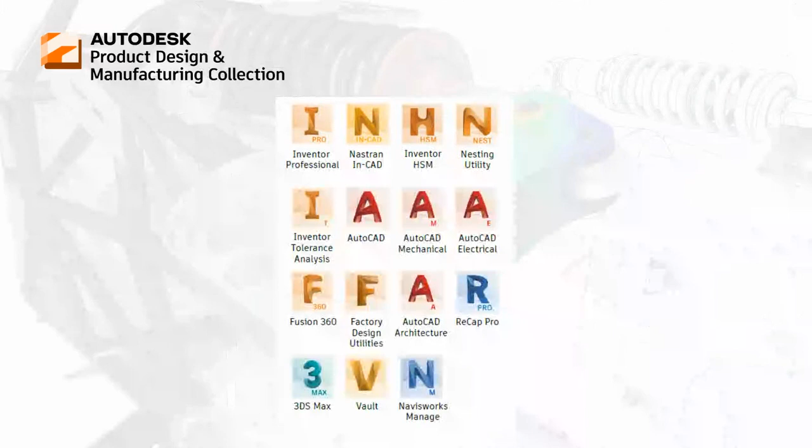So what is the product design and manufacturing collection? Autodesk came up with this idea as a solution. They didn't want to just create a product, Inventor, and have all these features in it. Because so many of us have cross disciplines in which we work, they came out with a collection. It's a powerful set of applications that provide extended capabilities to Inventor and AutoCAD for engineers who design complex and custom products, equipment, and systems.

With the collection, you can extend Inventor with a lot of add-ons for tolerance analysis, simulation, and production layout. We can use connected products for 2D drafting, large-scale design review, and visualization. We can connect to Fusion 360 to access Autodesk's next-generation capabilities and their collaboration tools.

Let's first discuss engineering design workflows. The first one we want to discuss is cloud-based 3D CAD. Cloud-based or online CAD software runs in a local browser or through a web or mobile app. Unlike traditional software installed on a local computer, you don't need to do any of that. You simply go online and it's there and always up to date and active. They offer many of the same capabilities as traditional CAD software, but are updated through a remote server and are acquired through a subscription, usually monthly or annual.

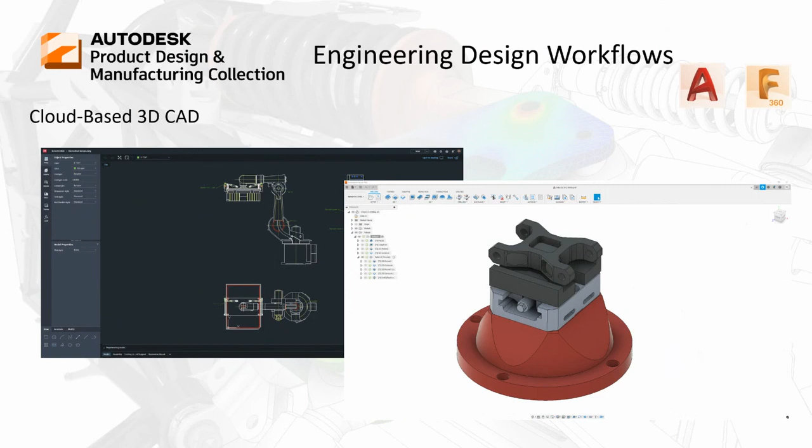It allows you to work remotely and collaborate with colleagues using AutoCAD and Fusion 360 from an internet browser. In addition, AutoCAD, AutoCAD LT, AutoCAD Web, and the mobile app offer connected workflows through some of the leading cloud storage providers, including Box, Google Drive, OneDrive, and Dropbox. Currently, in regards to SolidWorks, this workflow is only available as an add-on for three levels of software. The three primary levels we're going to discuss with SolidWorks today are their Standard, Professional, and Premium versions. This capability is available, but strictly as an add-on.

This one is very big. This is rules-based design automation. When we hear rules-based design, we typically think of and mean Inventor iLogic. Approximately one-third of everyone with a seat of Inventor uses iLogic regularly. It's a rules-based design engine and one of the most powerful and effective ways to save time. You can define rules to quickly reconfigure your designs. This helps satisfy the customization demands of your customers. You can even use it to generate an instant quote. And because you can quote faster and more accurately, you'll be able to get your designs to manufacturing faster.

It's also important to understand the scalability of the work you do in Inventor. What happens when you want to make your forms available to people who don't have Inventor, outside of engineering? Maybe it's sales. How can customers fill out forms from any location? When you're ready to take on the next step of automation, MicroCAD will be here to help you with Autodesk Forge. It's an automation API for Inventor where you can experience the advantages of running iLogic in the cloud.

SolidWorks does have some of these capabilities. It's very limited in all three levels of their software.

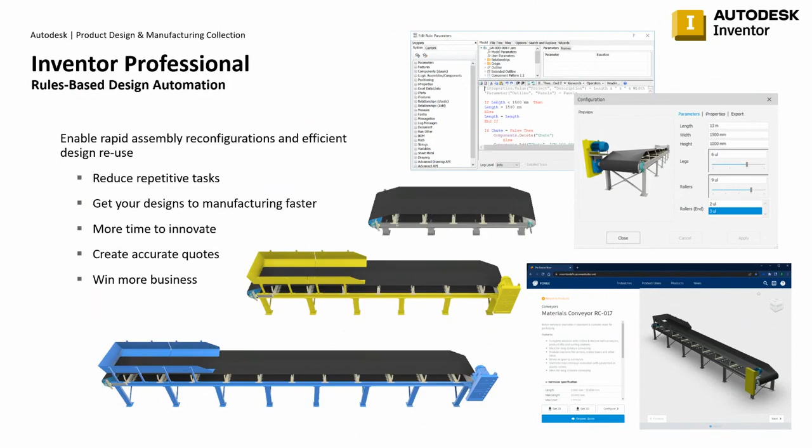Continuing with the engineering design workflows, we look at topology optimization, and the first one is lightweighting. What is lightweighting? It's how we can improve the strength to weight ratios by removing excess material that is not necessary for the design's performance requirements.

We look at shape optimization. It's a technology that helps inform certain geometry decisions to specific conditions such as manufacturing methods, maybe conventional subtractive machining, or maybe additive, 3D printing. Structural compliance calculates the physical response of a given shape depending on the forces it's subjected to. This type of technology is only available as an add-on for SolidWorks in all three of its levels, so you're increasing the cost of the software considerably with each of these add-ons.

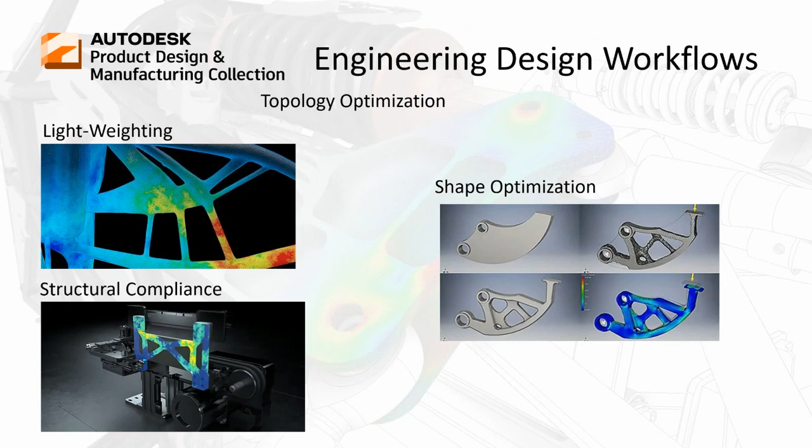Generative design is something that's very unique and very new to a lot of CAD users. It's basically a way of design exploration. Designers or engineers can input goals into their generative design software along with parameters such as performance or spatial requirements, materials, manufacturing methods, and cost constraints. The software explores all possible permutations of a solution, quickly generating design alternatives. It tests and learns from each iteration of what works and what doesn't.

As you can see here, this capability helped General Motors, shown in the top right of this slide, design a seat belt bracket that was 40% lighter, 20% stronger, but more importantly was also able to consolidate an assembly from 8 parts into 1, making it simpler and faster to install.

The second example is from a company called MJK Performance. The team was able to develop concepts faster, being able to do this and select their final design based on cost and time it would take to manufacture.

Now, the General Motors example is great, very organic, and able to be done with 3D printing or casting. That may not be the best method for everyone. It's also a consideration you want to take as far as the cost of what it takes to get to that final design. In MJK Performance's case, traditional 2.5-axis machining was appropriate for them. Then in the little image here, this is a popular bicycle manufacturer called SRAM, and they're using the technology to explore more options in some of their component designs.

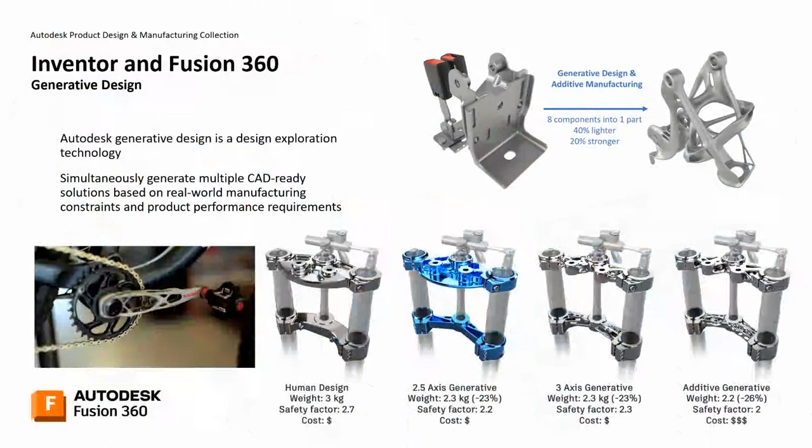Within Fusion, which is also part of the collection - there's Inventor, there's Fusion 360 - there are some technologies that are very similar between the programs, and some that are very different. In this particular example, PCB design is exclusive to Fusion 360. From the initial schematic diagram to PCB layout with layer definition to create the 3D board representation, it can all be created within Fusion 360.

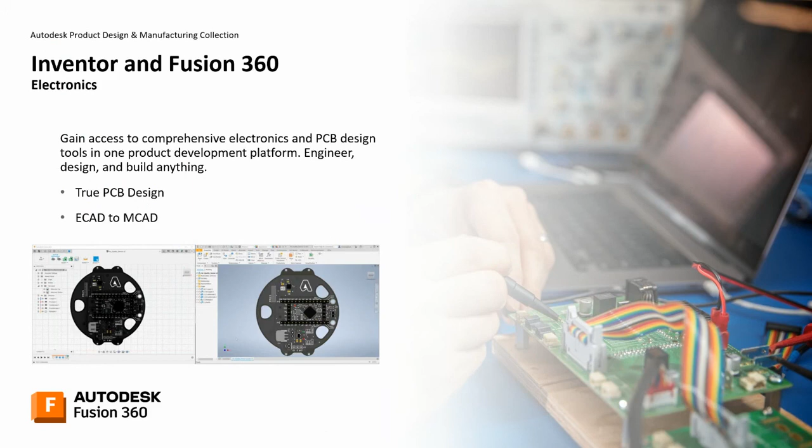Autodesk also just launched signal integrity for Fusion 360 electronics, which tests for electromagnetic compatibility and interference within your PCB design. This extends what users can develop within Inventor by enabling a bi-directional flow of information. For example, a space envelope designed in Inventor could be pushed over to Fusion, say an enclosure. This enables the designer in Fusion to create the PCB within the context of the enclosure, and once it's complete, that information can be pushed back to Inventor for a complete design, so we can see the PCB, the entire design, and the enclosure as one. As far as I know, this technology is not available in SolidWorks.

Continuing with the AutoCAD Electrical, Fusion 360, and Inventor compatibility, bi-directional collaboration between mechanical and electrical teams can be challenging. But what if electrical and mechanical designs could talk with each other? That's why the electromechanical workflow between AutoCAD Electrical and Inventor was developed, also known as EMX, the electromechanical exchange. Schematic diagrams can be created within the 2D toolset, which is AutoCAD Electrical.

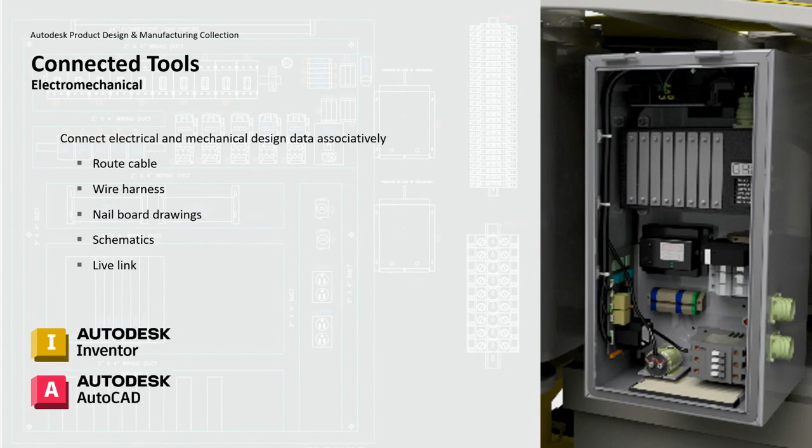Inventor electromechanical ensures both parties are aware of what's happening in each other's designs. Not only are you able to share up-to-date information between your electrical schematics and your Inventor 3D models, it also gives the mechanical designer the ability to generate 3D cable routes. If space is tight, approximate clearances can be accommodated, and an accurate bill of materials can be generated.

We're able to see real-time 3D wire routes. We're able to create nail boards for pre-manufactured assembly. We're able to get wire lengths, so for our costing and estimating for large quantities, it would be extremely more accurate. From my understanding, in SolidWorks this technology is only available as an add-on to their premium offering.

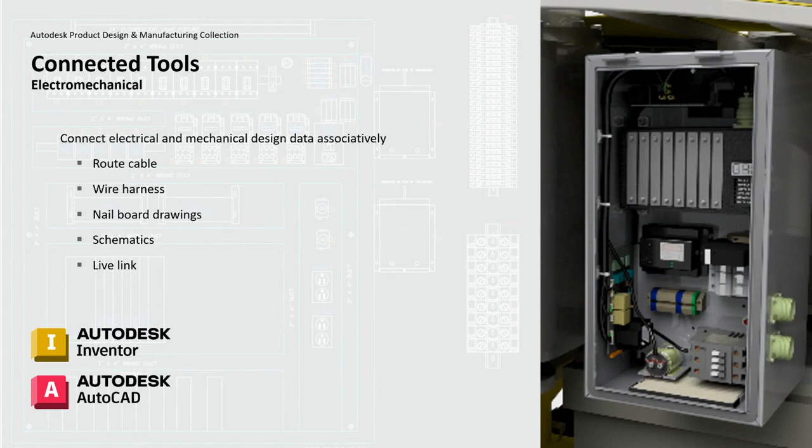In addition to its specialized modeling tools, Inventor has tube and pipe runs. Autodesk tube and pipe runs is an add-on, and these add-ons, as far as tube and pipe, when we get into simulation, are all included within the Product Design and Manufacturing Collection. There's no extra software that you have to purchase - it's all completely inclusive. It adds design tools for routing rigid pipes, bent tubes, and flexible hoses to mechanical assemblies or product designs in the assembly environment.

For SolidWorks, this technology is only available in their premium offering.

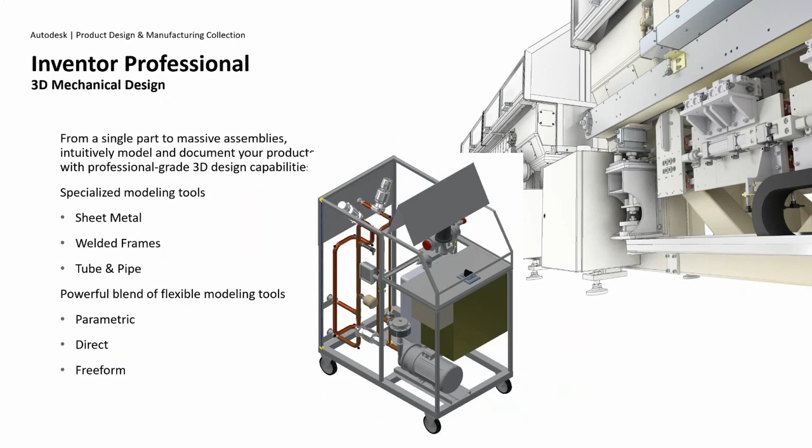Continuing with 3D mechanical design, Autodesk and the collection have these design accelerators. The design accelerators represent an important component of functional design - engineering calculations and decision support identify standard components or create standards-based geometry. Now, SolidWorks does have similar technology at all three levels, but only as an add-on.

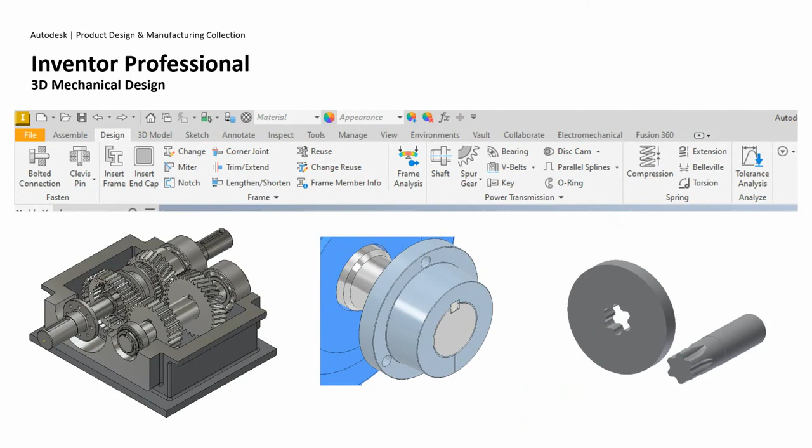When we extend the capabilities of the engineering workflows to factory layout, it allows you to quickly validate factory floor layouts for efficient equipment placement to improve production performance. Currently, this technology is not available in SolidWorks.

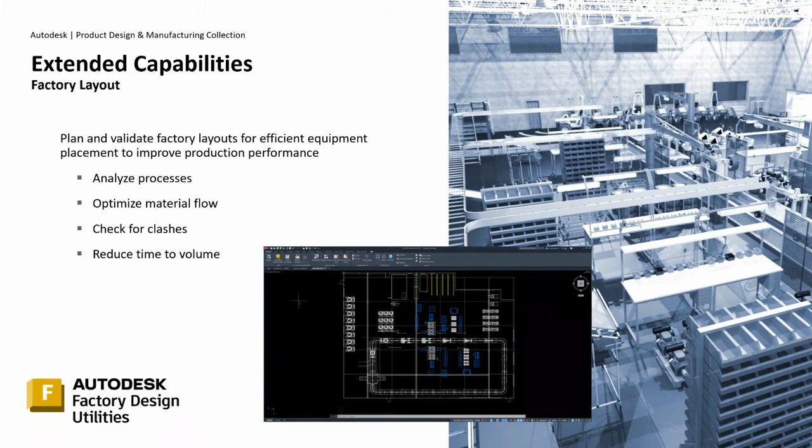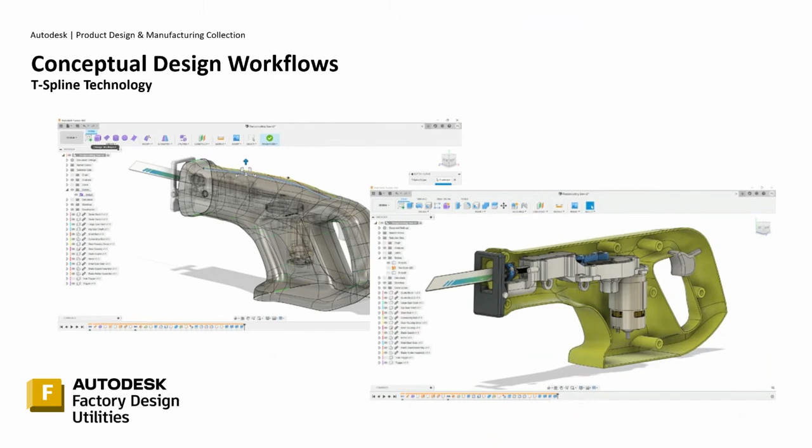Now I'm going to start talking about conceptual design workflows. Here we're talking about T-spline technology. Some of you may not have heard of it before, but what is T-spline technology? Simply put, it's a surfacing technology that reduces the effort to create complex shapes. If you've ever done any complex surfacing in the past, it's very difficult - they're not very associative or parametric. With T-spline technology, it is. And this technology also is not available in SolidWorks.

Simulation workflow - let's take a look at some of the advanced simulation workflows. Most 3D CAD software nowadays has some entry-level FEA. Many of you use it, which is great. Every license of Inventor Professional, for example, comes with stress and frequency study types. However, Nastran offers a complete set of tools for simulation workflows.

For example, dynamic simulation - you can simulate and analyze the dynamic characteristics of an assembly in motion. Assembly-level FEA - you can analyze stress, deflection, and frequency levels for parts and assemblies. Parametric optimization - you can optimize the weight and strength of your design by running a combination of variable dimensions. These three technologies are available in SolidWorks, but only in its premium package.

Continuing with simulation: nonlinear, so I can gain accurate results for materials containing nonlinear stress-strain curve data. Thermal - I can check temperature distribution and use results to determine thermal expansion. Fatigue - predict fatigue life based on a number of load cycles to failure. Vibration - I can monitor the levels and patterns of vibration signals within a component, machinery, or structure to detect abnormal vibration events and evaluate the overall condition of the test object.

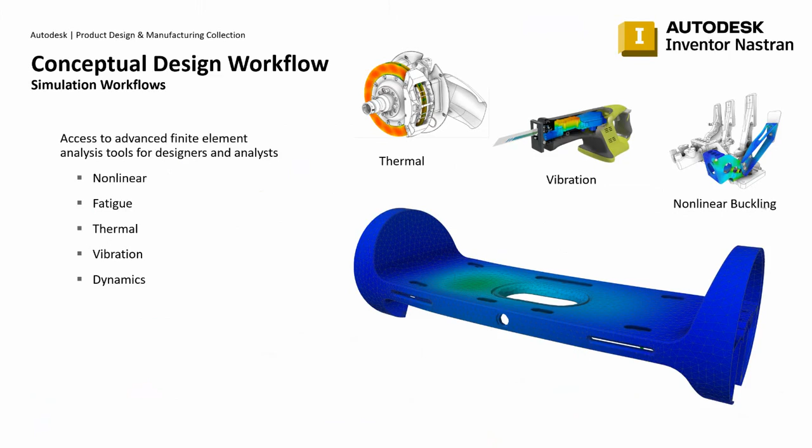We start talking about communicating workflows. Most of us work in a multidiscipline environment - we have customers that work in both the BIM and the manufacturing space. Multi-CAD data aggregation is a big deal, so one of the challenges you might often face is coordinating and communicating designs for review.

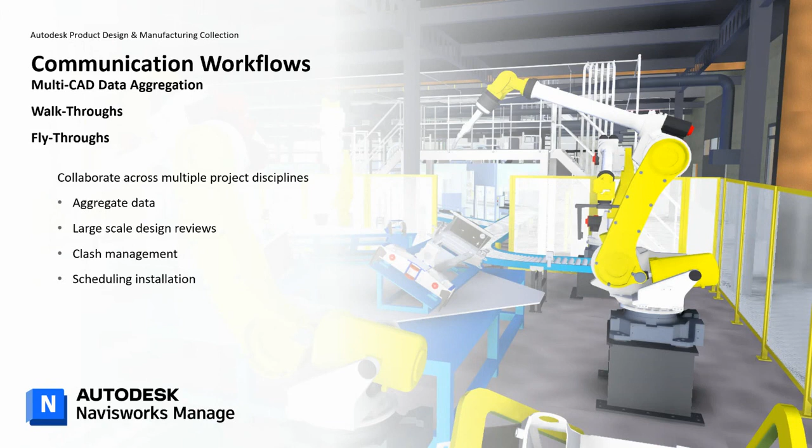Although many CAD systems can import information from other sources, it is often difficult to manage change. Depending on the complexity of the information, it may become challenging, especially when you have a model that contains hundreds of thousands or even a million-plus components.

This is where Navisworks comes in. This application is not only built for design review and walkthroughs, but it can also be used for clash management of models imported from other CAD systems, in addition to non-CAD data such as point clouds. With timelining in Navisworks, equipment information can be synced to your project management software, which helps assist the installation process of your design. Again, all of this can be accomplished while the data remains associative to the model data.

For SolidWorks, it has limited capabilities for walkthroughs and fly-throughs in all three levels. However, multi-CAD data aggregation and clash detection are not available.

Mobile and online sharing of 3D designs. So once again, you have this great idea, but how are you going to communicate it to your customers and other coworkers for review? The answer to that is shared views.

In just a few clicks, you have an online representation of your design that can be opened anywhere. People can access your design, make comments, measure the geometry, section it, explode it, and even mark it up and redline it if there are any questions or concerns.

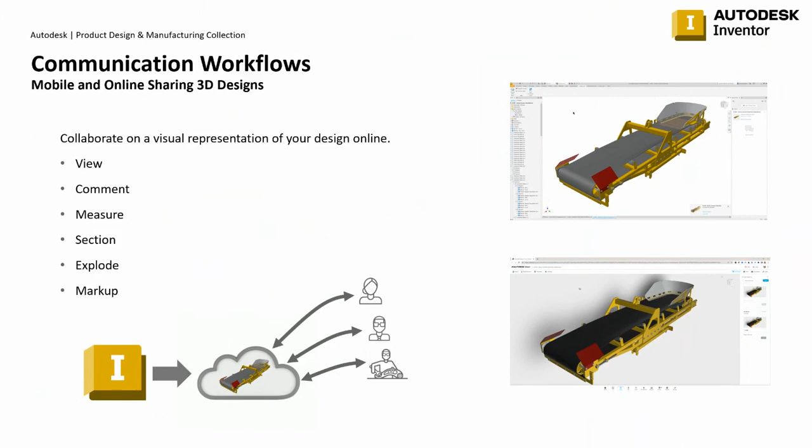Let's stick with interoperability for a little bit longer. Let's talk about BIM, Building Information Modeling. This is the foundation of digital transformation in the architecture, engineering, and construction space. Participating in BIM projects is now easier than ever for those looking to get spec'd in building projects.

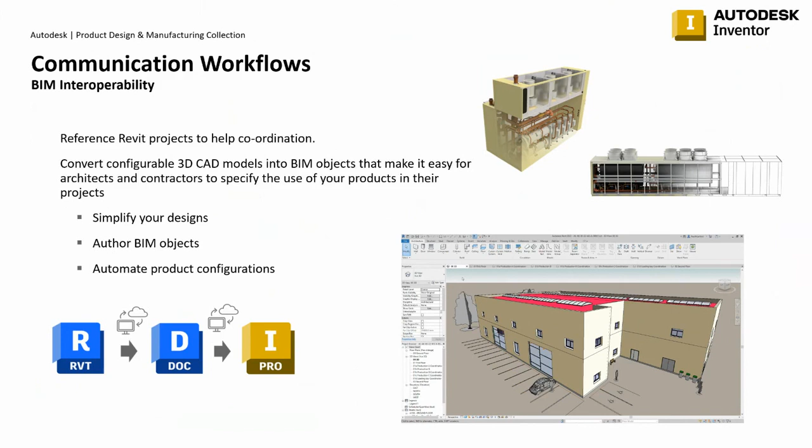Or if you're collaborating with architects to design custom buildings, your designs may be highly detailed and ready for production, but architects don't need all that detailed information in the 3D model. In Inventor, they can be quickly simplified using automated tools and then authored as BIM objects.

Then there are those who create custom fabricated designs for building projects, like staircase designs or awnings. Many times you need to work around the Revit data.

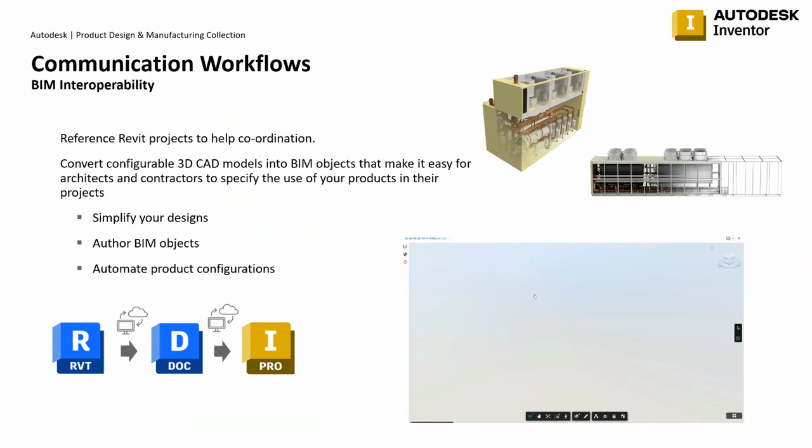Beginning with Inventor 2023, data exchanges can now be sent directly from Revit to Autodesk Docs. Using the Forge viewer, users of Inventor can access the Revit view they need and include it in their project. It even remains associative if the Revit user uploads a revised data exchange. This eliminates the need to email Revit files and revisions that need to be imported into Inventor.

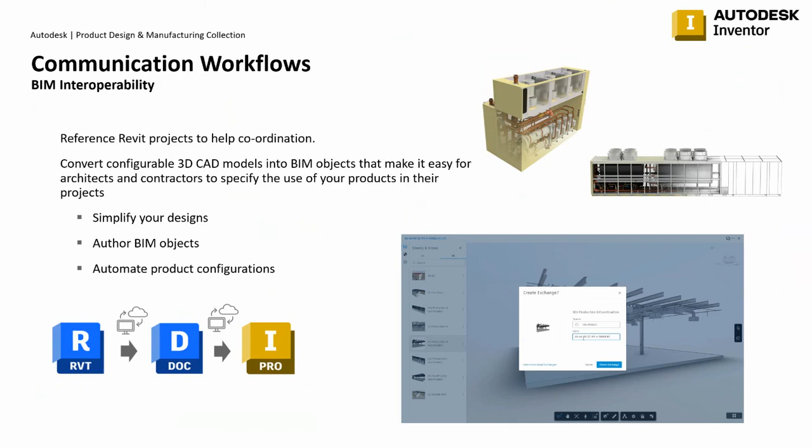With point clouds, you can register, mark up, and measure reality captured data that is ready for 2D and 3D applications. As mentioned before, this data can be imported into Navisworks and used for walkthroughs, fly-throughs, and clash detection.

As far as SolidWorks, this type of product is only available in their premium level.

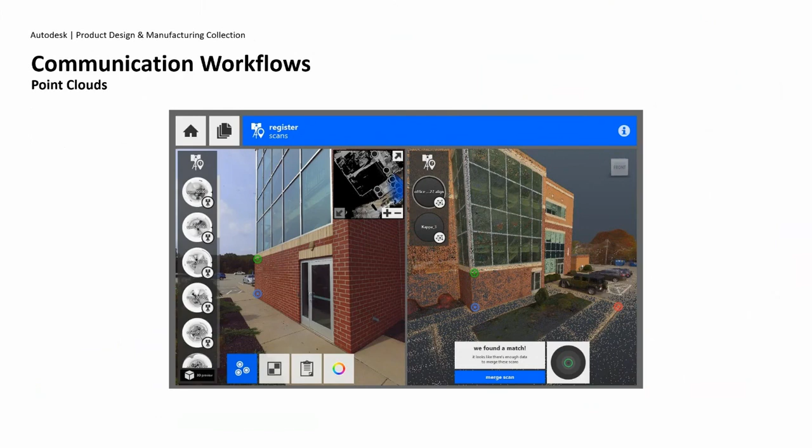For manufacturing, we have Autodesk Inventor CAM and Fusion 360. They provide a seamless workflow from design to manufacturing because it's integrated in both products. It includes functionality for 2.5 to 5 axis machining, as well as lathe and mill turn applications.

For 2.5 axis machining, it's standard milling operations: 2D roughing and pocketing, drilling, facing, and contouring. For 3 axis, we're talking about 3D machining strategies, including parallel, contour, scallop, horizontal clearing, and more. For multi-axis machining, it's 4 and 5 axis features for machining complex models.

The advanced roughing strategy is available for clearing large quantities of material effectively. Turning and mill turn is a combination of turning and milling features on lathes with powered rotary tools.

In regards to SolidWorks, it does provide 2.5 axis in all 3 levels, but the remaining technology does require an add-on.

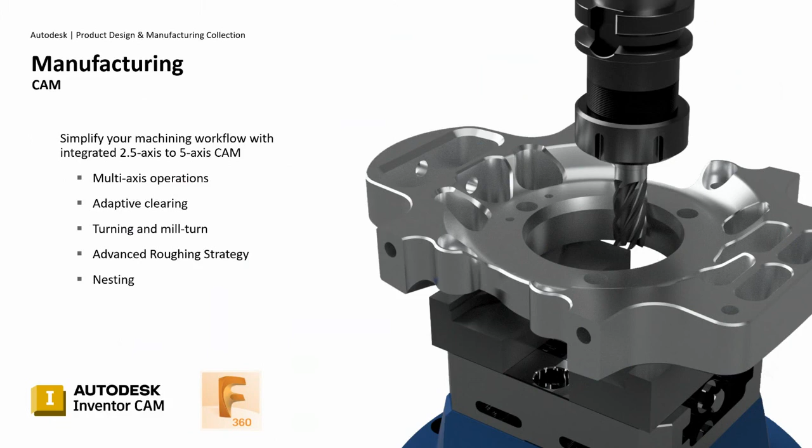For nesting, when you have multiple flat components that come in different shapes and sizes, it can be challenging to create a nested layout that produces a minimal amount of material waste. Autodesk Inventor Nesting is an integrated nesting software that helps you optimize yield from raw material.

Nesting studies can be created and then updated to reflect any changes to your design. You can easily compare nesting studies to optimize efficiency and use Inventor CAM for the laser cut toolpaths.

Same as before, this is available in SolidWorks, but only as an add-on.

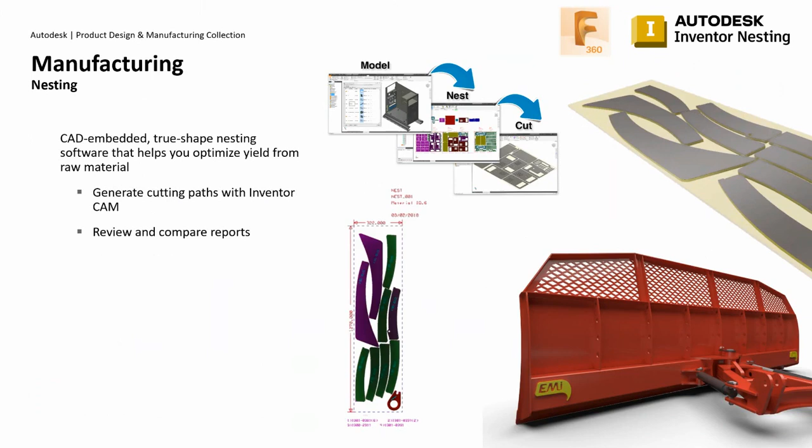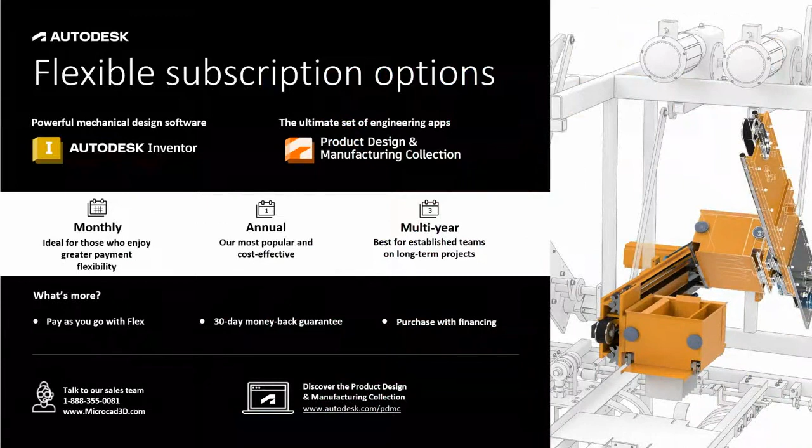So that's basically a summary of the reasons why people are choosing Inventor or the collection over SolidWorks. In addition, we have very flexible subscription options. You have the ability to do monthly or annual basis, and there's also a token-based system where you purchase a technology, use it when you need it, and save those tokens for a time when it's actually necessary.